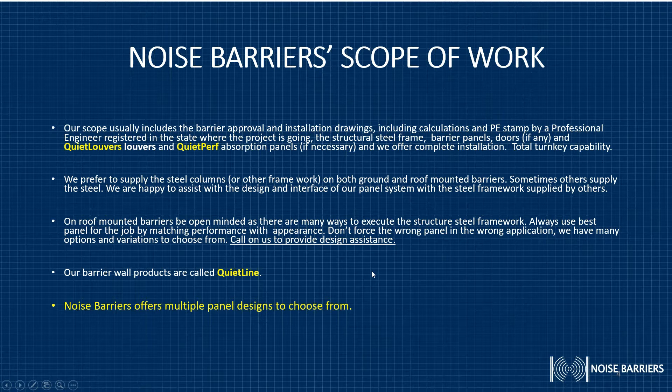Our barrier wall products are called QuietLine. Noise Barriers offers multiple panel designs to choose from. We offer a shiplap design, which we call SL. We offer the shiplap with a reveal, which we call the SLR. We have a shiplap reveal panel - that's a concealer, is what we're calling it, and you'll see more about that later on. We offer a V-stack panel. We offer our quiet mod panel with both skins hard, hence the hard designation. And we offer the quiet mod HP panel, which is hard on one side, perforated on another.

The purpose of this webinar is to introduce you to two unique barrier panel systems: V-stack panels and our SLR concealer. We're going to start with the V-stack panel system today.

When we started Noise Barriers in 2003, we only had one panel designed to offer. It's 2 feet high and limited to 12 feet in length. That's still the standard panel size for many other companies. We quickly saw the need for larger panels, both in height and length, to help lower the overall cost of barrier projects. We also saw the need to improve on the panel-to-panel interface. The result was our V-stack panel design, which is by far our most popular and most competitive panel. Let's take a look at it.

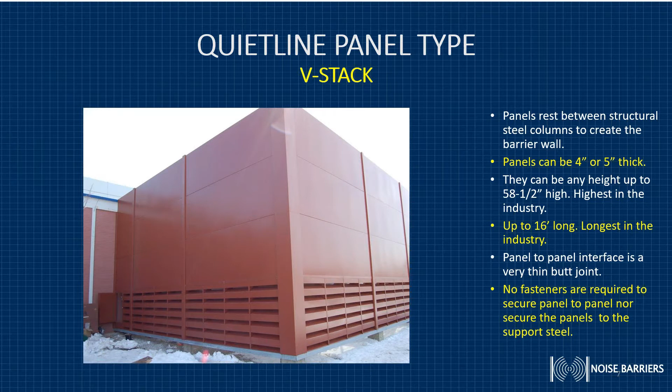The V-stack panel is designed to slip between the flanges of the column and create a barrier wall. The panels can be 4 or 5 inches thick. They can be any height up to 58.5 inches, which is the highest in the industry. They can be up to 16 feet long, which is the longest panel in the industry. The panel-to-panel interface is a very thin butt joint that you can see in this photograph. No fasteners are required to secure the panel to another panel or to secure the panels to the support steel.

This wall section shows the V-stack panel. You can see that it's acoustic fill sandwiched between a 16 gauge solid sheet of steel and a 22 gauge perforated face. The panel-to-panel interface is accomplished with 2 inverted roll-form V's that nest the joining panels together without the need for fasteners. This creates that very thin horizontal butt joint between the panels.

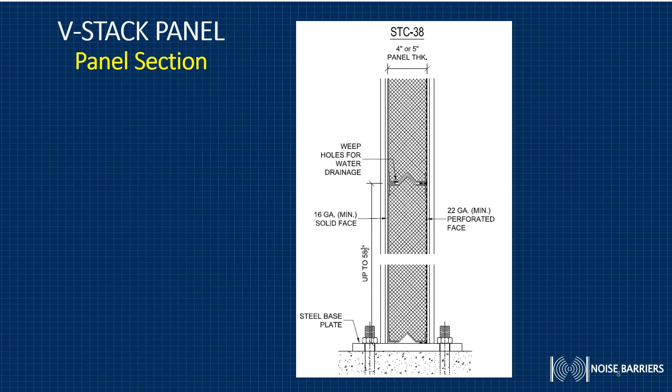This drawing shows a couple of different ways that we can install these panels into the structural steel columns. On the left, you see panels fit snugly between the flanges. On the right, you see that they're using a larger column, which is a wide flange beam. And to create the slot for the panels to fit into, we either bolt or weld a 3x3 1/4-inch angle to the web of the column, creating the necessary slot.

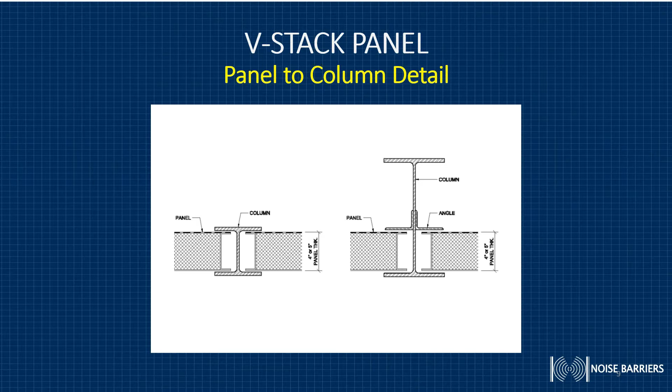A third option for installing the walls is to do them vertically, resting the panels on a support shelf angle connected to the columns. For example, if tube columns are used in the design of the building. This is seldom used, but we want you to be aware of it as an option for some projects.

This detail shows how we accomplish the corner when 2 walls intersect or create a perpendicular condition. On the left, we see just the panel-to-panel connection into the column. The detail on the right shows we've added angle to the back face of the flange of the column in the corner, creating slots for the panels of the perpendicular wall. We can accomplish the same kind of detail with either acute or obtuse angles, so whatever the site conditions call for, we can have that barrier wall turn corners.

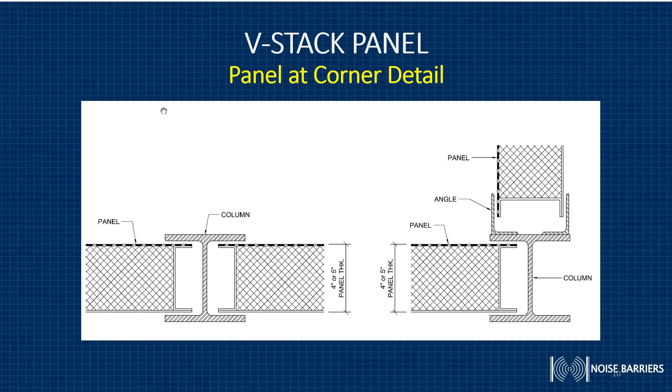Here are 2 examples of the V-stack. On the left is a 30-foot by 40-foot by 20-foot high barrier constructed around a couple of emergency generators. In the background you see patient rooms at a hospital—this is at a VA hospital—and across the street, about 150 feet away, are local residences. This enclosure was very necessary to contain the noise because they run these generators 24/7.

What I want you to look at in this photograph is the butt joint where the panels join together vertically. You can also see how the corner detail is handled, and notice the panel into the wide flange beam column. The column is noticeable, painted to match, but it's still there. Also, a nice feature, this one has a personnel door on it.

The photograph on the right is at an activity center down in Chicago. You can see this barrier was built to protect the residents right behind the wall from the mechanical equipment going up where all these white boxes are. This is a 24-foot by, I think, 150-foot L-shaped wall, 12 feet high. This is an advantage of the V-stack panel—we can get these long spans and high panels so we can minimize the number of panels.

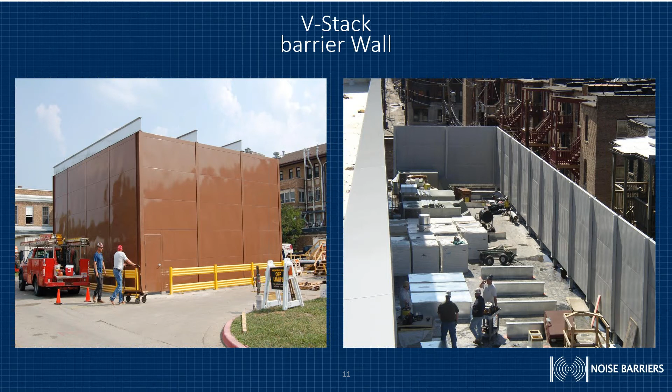In some applications, architects have asked us to include cladding on top of our barrier wall instead of finish painting it. The V-stack system is excellent for this because we can use an unpainted galvanized panel that's oversized, which again brings down the square foot cost. You see here how we attach the cladding to the face of the panel, and on the right you notice the completed barrier wall.

On this particular project, at a university in Chicago, there are 6 walls, and all have this cladding on them. The rest of the building, visible to the right just above the beige building, has the same cladding on it. So we were able to maintain the aesthetic look for this building.

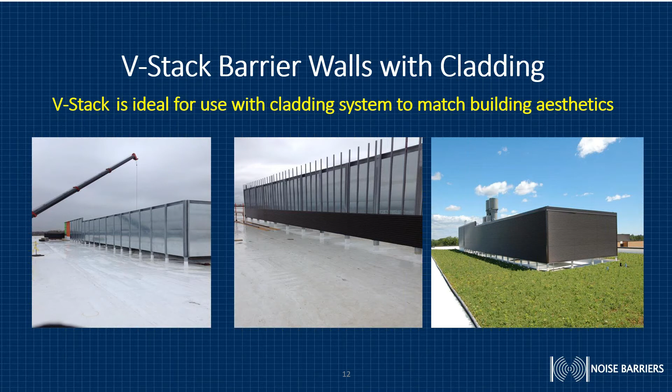As an interesting side note, please look closely at that green surface—that is actually a wildflower garden on the rooftop of this building, part of the City of Chicago Green Initiative for rooftop buildings. So we've done barriers quite a few times where we end up seeing grass or other plantings around our barrier walls. Nice detail.

Typical uses for this V-stack panel are in applications where aesthetics are not as critical. The V-stack provides a lower square foot cost barrier than other designs. It's excellent in applications that require long walls—the 16-foot length requires fewer columns, fewer foundation piers, and fewer panels to install, all factors that reduce labor time and overall project costs.

I'm going to show you some example drawings later in this presentation that'll demonstrate this very clearly. In applications for higher walls, 20 feet high and higher, the available 5-foot panel height results in fewer panel-to-panel installations vertically, resulting in a lower overall cost.

After our success with the V-stack, we listened to what architects were asking for. Architects wanted a more linear appearing wall to match their building design. Our first effort was our SL, or shiplap panel, and we're glad we listened to our customers, because this panel became very popular with architects.

Then some architects asked us to develop a linear panel with a reveal. So shortly thereafter, we introduced our SL-R panel, which is a shiplap with a reveal. This was also a very successful panel.

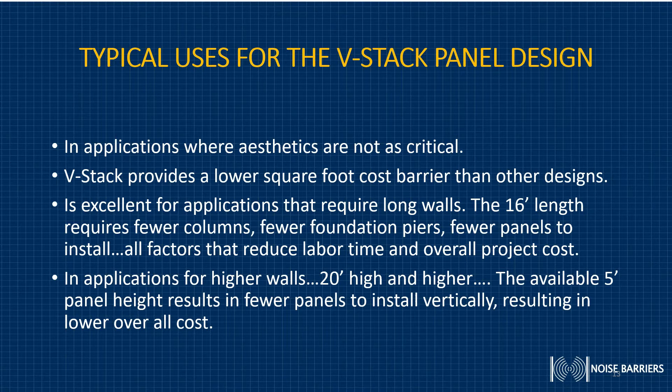Glad we listened again. It wasn't long before architects asked if we could develop a panel that could conceal the support steel. The SLR concealer panel was developed based on these requests, and it's a unique and attractive panel. By the way, if you take nothing away from this presentation, please remember, Noise Barriers listens to what our customers want. We're flexible, and we want to help you achieve your design goals while meeting the acoustic performance requirements of the project.

So here's a concealer panel. Concealer panels are designed to conceal the columns by sliding over the column flange rather than behind it. Panels are typically 5 inches thick and 24 inches high. They can also be 16 feet long. The panel-to-panel interface, both horizontally and vertically, is a 1-inch reveal. Again, no fasteners are required to secure panel to panel, nor to secure the panels to the support steel.

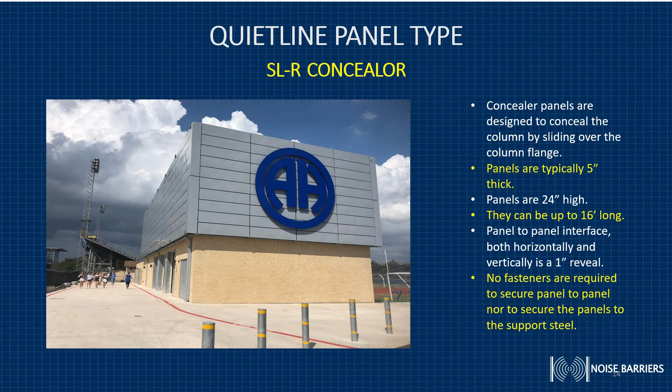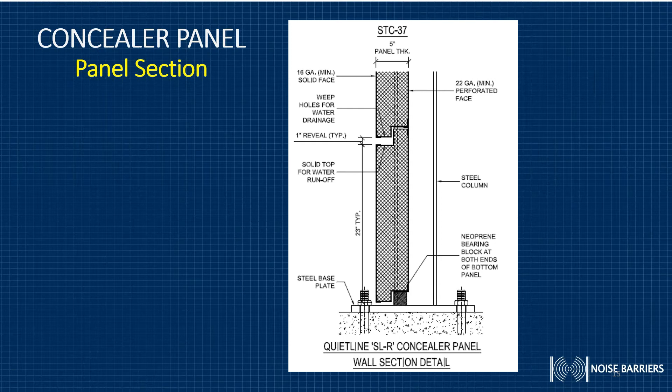This section shows the SLR panel from the side. You see the same type of construction, a solid skin and a perforated skin encapsulating acoustic fill sandwiched between them. Only in this case, there's a reveal. Typically we provide a 1-inch reveal, and you see that halfway up the panel where the panels meet. We can go a little deeper on that, or make it shallower, on projects that require it.

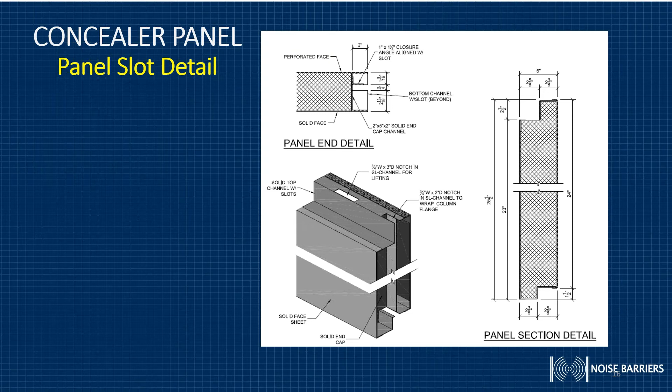We put this detail in so you can see how we accomplish this slot. If you look right in the middle of this drawing, you'll see the 3/4 inch wide by 2-inch deep notch. That's what slides down over the flange, running the height of the panel. Next to it, you can see a 3/4 inch wide by 3-inch deep notch in the SL panel channel for lifting. We'll show you the purpose of that later in this presentation, so try to remember it.

Here are a couple of methods for attaching the concealer panel to the front flange of the column. In option 1, this was done with the typical structural steel detail—the panel just slides from the top down and hides the structural steel, creating a 1-inch reveal. Option 2, somebody might ask, why would you do that? This is on a project where they actually wanted the panel to hang out over and be proud of the building roof. So additional steel, creating a flange for us to slide the panel onto, was added to the face of that flange.

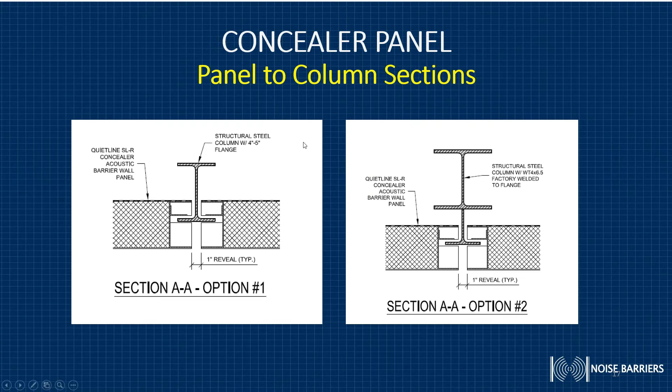Another advantage of this concealer panel is that we can manufacture pre-formed corners. We can go up to 24 inches by 24 inches, and this detail shows how we accomplish that. The panel comes to you fully assembled in this corner detail.

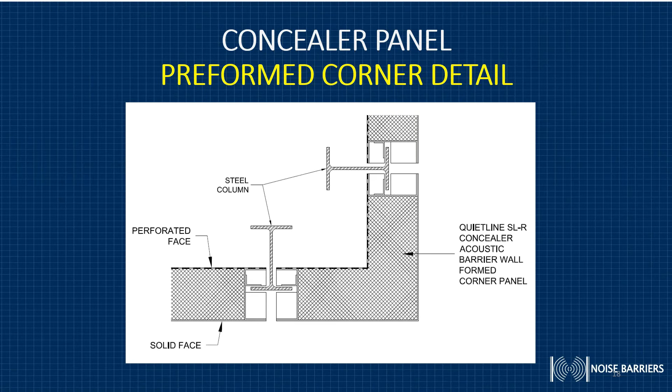All right, so here's what the concealer barrier wall looks like. Please notice the uniform reveal both horizontally and vertically. Remember that one option where the panel hangs out over the roof a little bit? That detail was used here. You can clearly see the preformed corners and how clean those look. You also can see, on the far left side of this photograph, a personnel door for access to the mechanical equipment.

So what's really the difference between the concealer panel and the standard panel? Take a look at these two photographs. Again, the one on the right is the photo you just saw—notice the clean lines, the uniform reveal, the preformed corner. The panel on the left is the old original way of doing an enclosure or barrier on a roof, where you're between the front and back flange of the column. You can also see the corner detail is exposed wide flange steel. In this case, the architect did even want the barrier columns painted to match, but still you would not have as attractive a detail as you do with the concealer panel on the right.

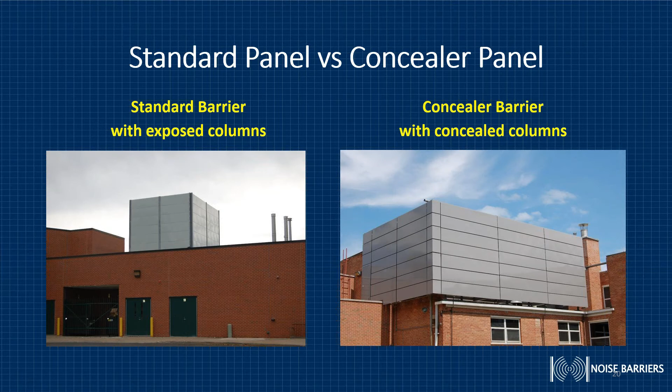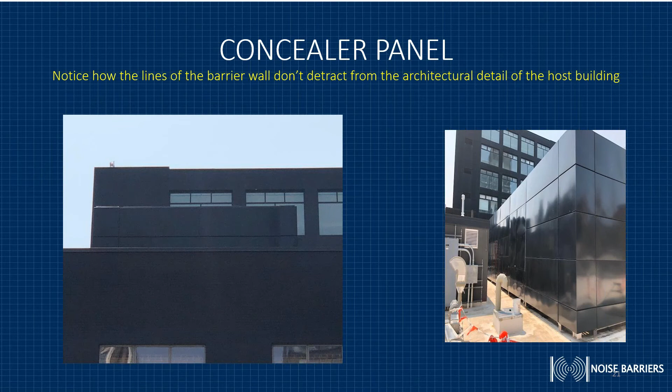The typical uses for the concealer panel design are applications where aesthetics are critical, because we can match the reveal of the building design. It looks more like part of the building that was intended, as opposed to just a barrier around equipment. It conceals a structural support system, so it's a much nicer look. The preformed corner panels provide a nice finishing detail.

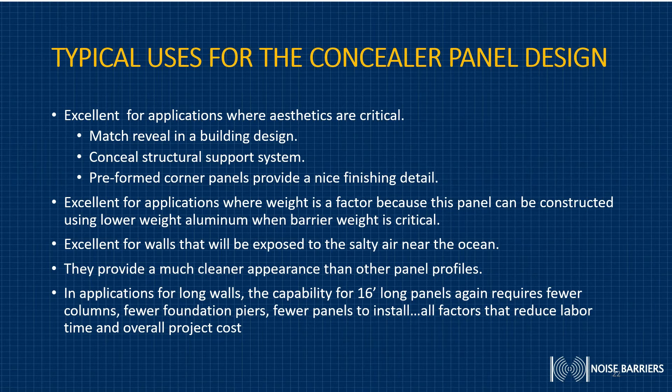Concealer is also excellent for applications where weight is a factor, because this panel can be constructed using lower weight aluminum when barrier weight is critical. It's excellent for walls exposed to the salty air near the ocean, using aluminum. They provide a much cleaner appearance than other panels, and for long walls, the capability for a 16-foot long panel requires fewer columns, fewer foundation piers, fewer panels to install—all factors that reduce labor time and overall project costs.

Both of these panels have very similar acoustic performance. The V-Stack has an STC of 38, while the concealer panel is 37. They both have a noise reduction coefficient of 0.95. So both panels are as good as they come for barrier walls.

Noise Barriers was started by former representatives of other noise control firms. We learned from experience how difficult noise control products can be to install because of their weight, bulk, and difficult locations. So we dedicated ourselves at Noise Barriers to designing methods for making product installation safer and faster, and we've done that with our barrier walls.

One laborer simply inserts the lifting hook into the slot at each end of the panel, lifts it out of the crate, and slides it down the column within the slot, as we discussed earlier—or in the case of the concealer panel, the panel just slides over the flange. Once that panel is seated, the hooks are removed, and the next panel is hoisted and set in place.

Without this lifting slot, the way we used to do it—and other companies still do—it's necessary to have two laborers on the ground to lift the panel out of the crate and wrap a sling around it to lift it. Two more laborers are then needed to guide the panel to the column. The panel then needs to be blocked up so the sling can be removed and dropped into place. This is very dangerous; you can get a hand or finger caught very easily. It's also very difficult and time consuming.

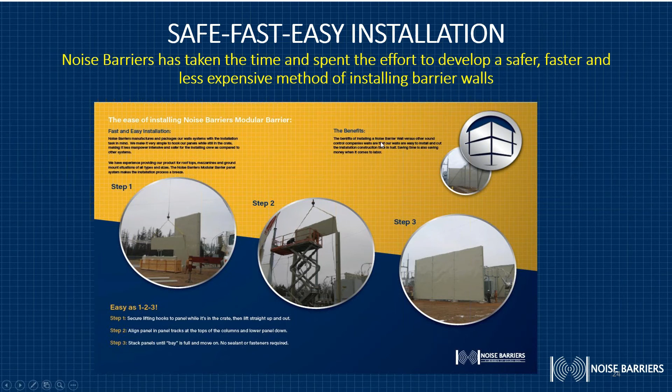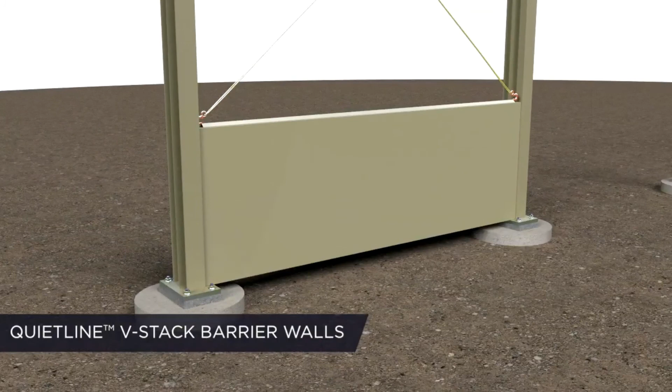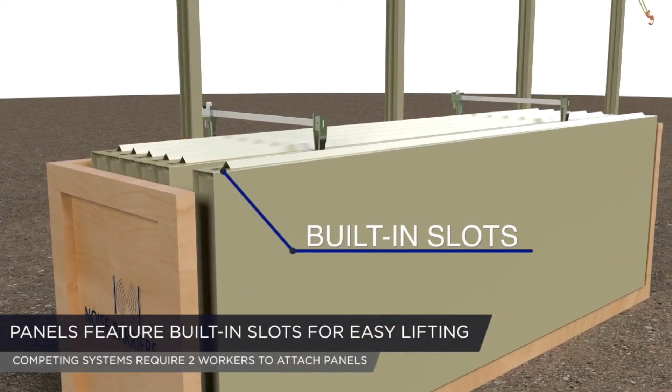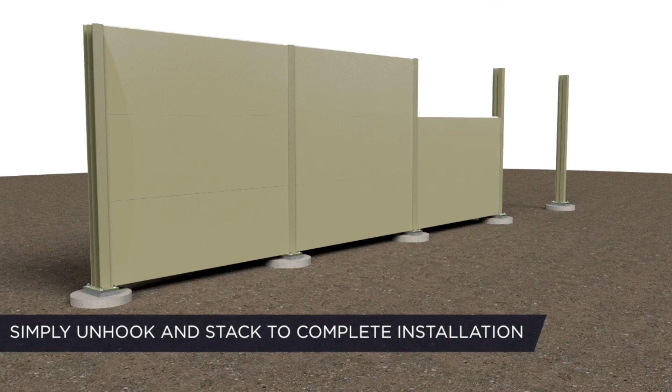Introducing QuietLine V-Stack Barrier Walls by Noise Barriers—an easier, safer way to install noise barrier walls. Please review the installation packet in the crate and consult the install documentation for a list of tools needed. Columns are set in place and fastened to existing or precast anchor bolts. When the V-Stack crate arrives at the job site, it is placed on level ground and braced so it won't tip over as load becomes unbalanced. Before removing the first panel, clamp the remaining panels together to prevent them from falling over. The V-Stack panels feature built-in slots for easy lifting and are designed to be lifted directly out of the crate, while competing systems require two workers to lift, temporarily support, and install straps for lifting. The panel is lifted and guided between the columns, coming to rest on the base plate. The hooks are then simply removed to complete the panel installation. Other systems require two workers to perform the tedious and slow process of temporarily supporting, unstrapping, and then placing panels. V-Stack installation requires no fasteners—there is no time wasted supporting, strapping, and unstrapping panels. Simply unhook and stack. To build better, smarter noise barrier walls, visit us online at noisebarriers.com.

One more note on that installation technique: when you're installing these heavy panels, you have to use a crane in almost every application. Cranes are very expensive. We can install panels so quickly that not only is your labor time reduced, but so is the amount of time you have expensive equipment on site, and there's always a battle to get that moved as quickly as possible.

Typical features for the V-Stack and concealer panels is that both are constructed using 16 gauge solid skin and 22 gauge perforated skin. We can do heavier gauges if necessary. Standard material we use is G90 galvanized, but we can use A60 galvanneal, stainless steel, or aluminum if required for both panel types.

Panels over 48 inches high—this would be the V-Stack—include additional internal stiffeners to accommodate the high wind load.

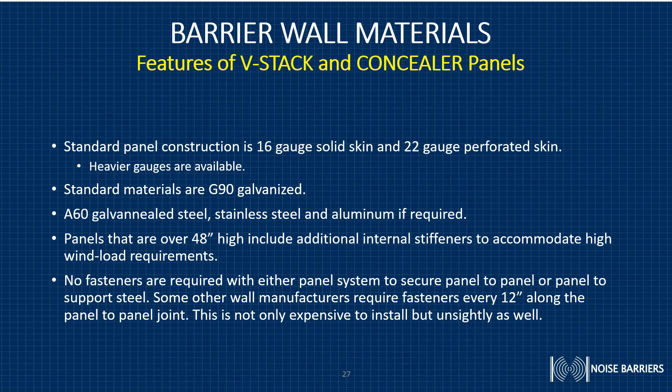On all our barrier walls, they may or may not have to have a top cap as a design feature required by the architect, and we can supply that. All of our barrier panels include weep holes along the bottom edge for water runoff.

Some barrier walls may require a personnel single leaf door or an equipment access double leaf door. We can include those. Some barriers may require louvers for airflow at the base of the wall. We can provide our quiet louvers in those applications.

Some barriers are tied into a host building wall. That building wall may require sound absorption panels to prevent sound reflection. We can include quiet perf absorption panels in our project.

Finally, acoustic fill is generally not encapsulated because it naturally sheds water. But in applications where bag fill is required, we provide that feature as well.

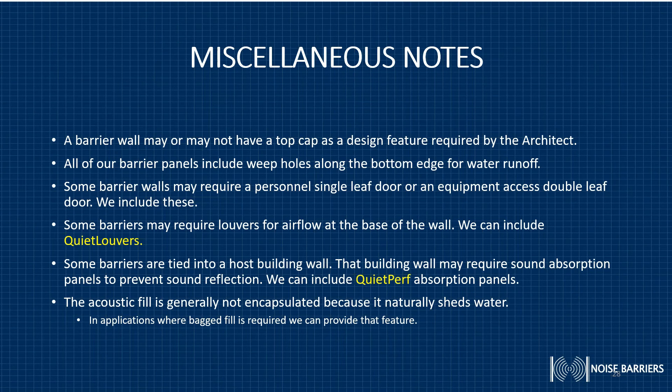So in summary, Noise Barriers offers turnkey capabilities: design, PE stamp, structural framework, barrier panels, doors, absorption panels if necessary, and installation services. We listen and we're flexible.

We have 6 different panel configurations to meet architectural or acoustic performance needs. We can use steel or lightweight aluminum panels. We have the longest and tallest individual panel sizes available, which reduces material, steel, and labor costs.

The concealer panel system conceals the support steel and has preformed corner panels for a clean appearance. We've developed a fast and very safe method of installing panels.

A durable powder paint finish in any standard RAL color is available, and we can custom match colors if necessary. We offer the longest warranty in the industry: 5 years for materials and 10 years for finish against peeling and cracking.

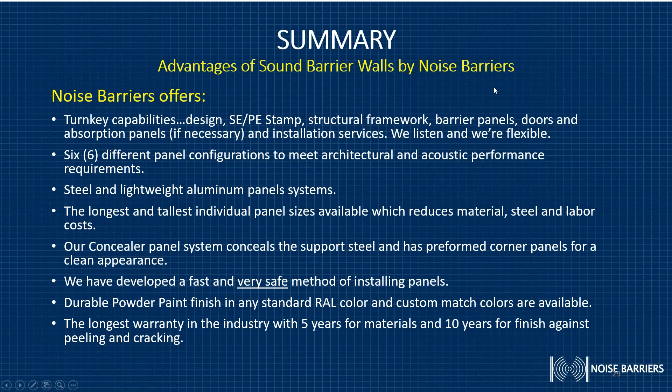With a 2-foot high by 12-foot panel, there's 10 per bay, 40 panels total. There's 4 bays of panels requiring 5 columns and concrete piers.

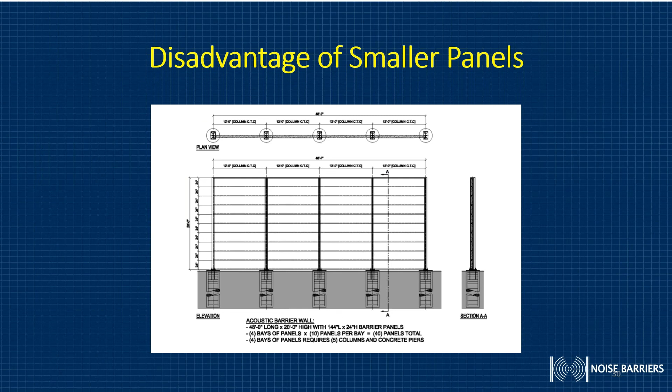The material on material costs is probably very similar because it's the same amount of steel and insulation and everything, but there's less labor cost for us to build a panel. It takes almost as much labor to build a small panel as a large panel.

But the big savings are out in the installation, in the field, where the crew can get in and out much quicker, and there are many fewer parts to work with.